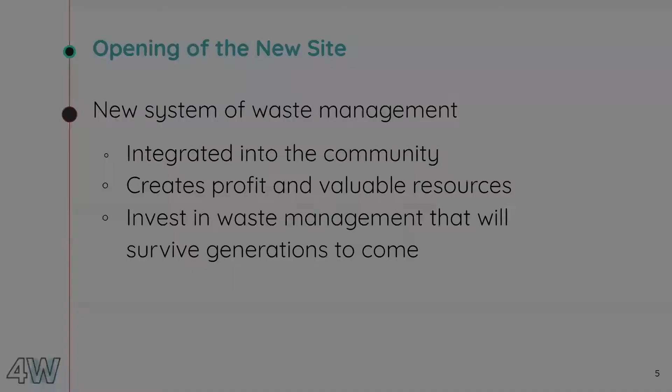In terms of some of the societal impacts that we want to implement, we really want to improve quality of life for everyone in the area. And that includes ending discrimination of waste pickers and other people who work with hazardous waste, creating well-paying jobs, and ending child labor. The current site is across the street from an orphanage, and that's actually been a source of child labor in the past, and we want to end this practice. And with that, I'll turn it over to Maddie.

First, we'll be going over the closure of the old site in Bakote. This section will discuss the implementation of the gas collection system, the cover, a groundwater pollution mitigation system, monitoring processes, as well as the redevelopment of the old site, and an overall financial analysis.

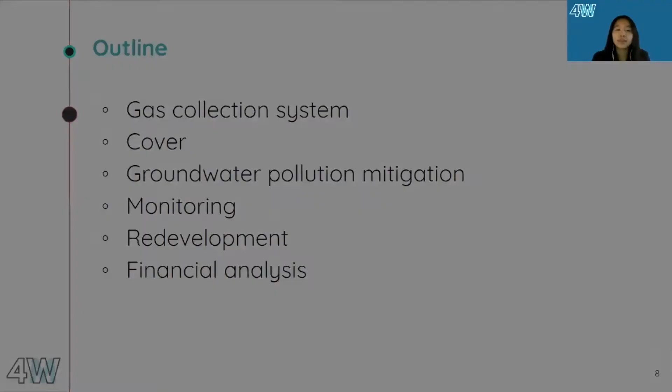So, a gas collection system is required for closure because the decomposition of organic waste in landfills produces significant amounts of methane and carbon dioxide. This is undesirable because it can cause instability of the site and potential collapse. Additionally, methane is highly flammable, so it can cause uncontrolled fires. The emissions of these gases from the site are harmful to our environment, and gas migration to the communities is also harmful. Thus, a gas collection system is necessary for closure.

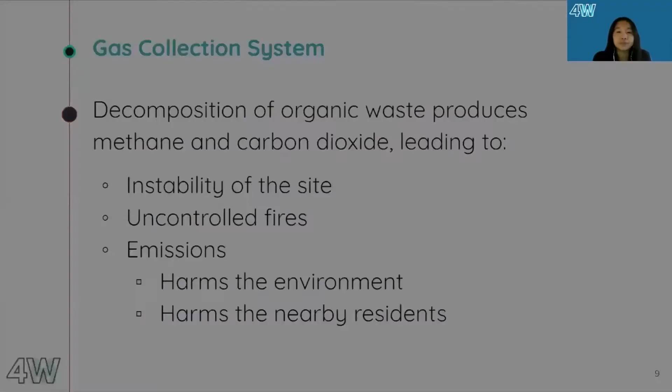Switching from an anaerobic, without oxygen, to a semi-aerobic, with oxygen, decomposition process can reduce emissions by up to 40%. This is done by installing gas extraction wells in the landfill to introduce oxygen into the waste and allow for the gas to escape up through the wells in a controlled manner.

So first, a hole will be drilled into the waste layers with a well drilling rig. Then a perforated pipe will be inserted into the borehole. The area surrounding the pipe will be filled in with gravel, which will prevent anything from entering the pipe, so it's just the gas that will be extracted. Above the perforated section, a layer of backfill will be added, as well as a layer of bentonite in order to prevent air intrusion and gas escaping outside of the pipe. Finally, a landfill cover will be installed, which will be further detailed in the next section.

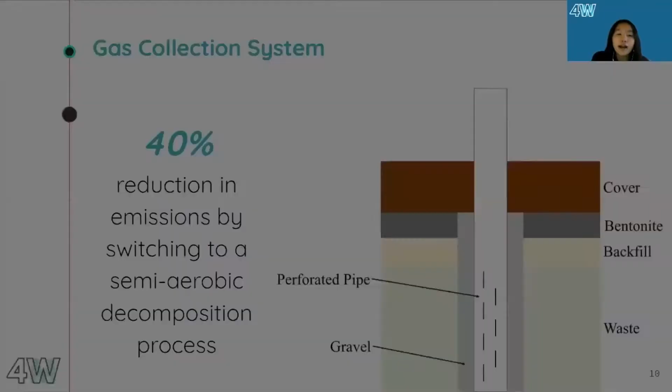A preliminary study to measure the amount of gas should also be conducted in order to determine the effective radius and how many wells need to be installed. Then, after gas is collected by the extraction wells, it will be combusted using a utility flare design. This is the simplest and least expensive combustion technology while still achieving a 98 to 99% combustion efficiency.

Another option that was under consideration was converting the landfill gas into renewable energy. However, that would require an extensive installation of horizontal pipes both beneath and above the waste, as well as building facilities to convert the gas into energy. Thus, the treatment of landfill gas is not physically or economically feasible for the Bakote dump site.

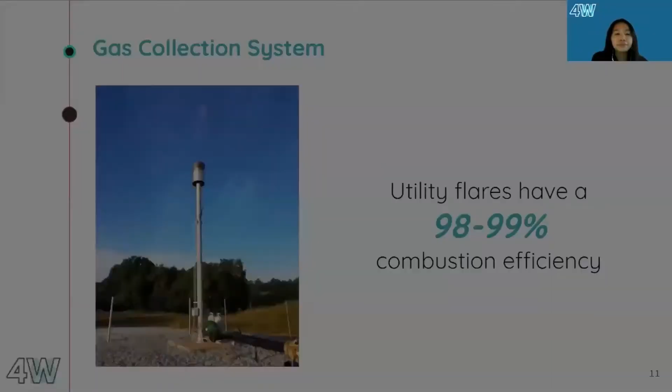Next, I will be going over our proposed landfill cover. We propose an evapotranspiration cover for the Bakote dump site. It consists of 3 layers above the waste layer: an interim cover, a coarse grain layer, and a fine grain layer. First, landfill compactors will be used to compact the waste prior to the installation of the cover.

Then the interim cover will be immediately above the waste and composed of compacted clay. This will prevent any surface water from entering the waste and generating more leachate. Gravel or sand can be used for the coarse grain layer and will help reduce water percolation in the interim cover. And the fine grain layer will use available soil and it will retain any water until it's removed by evaporation or transpiration through the vegetation.

Tractors will be used to compact the waste and load the soil into the layers. A landfill cover is required because it prevents surface water from entering the waste and reduces leachate generation. It also prevents landfill gas from escaping from the landfill and forces the gas to vent through the extraction wells. It also reduces odor and insects.

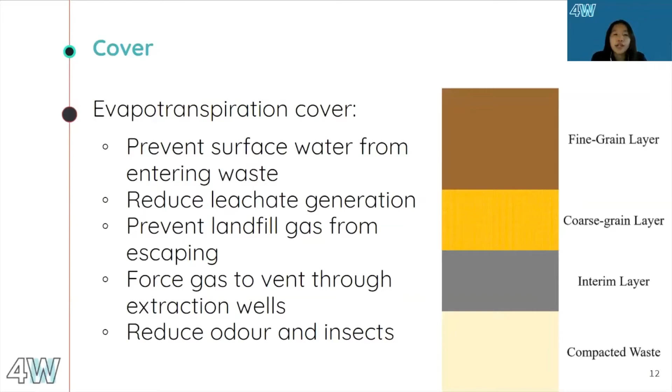Pollution from leachate generated within the landfill can seep into the groundwater and affect human health. A proper landfill would typically have a liner and leachate collection system in order to solve this issue. However, since the Bakote dump site is already full of waste, there would be many challenges in order to install a liner and leachate collection system. It would be very labor-intensive and expensive and is not feasible for the site.

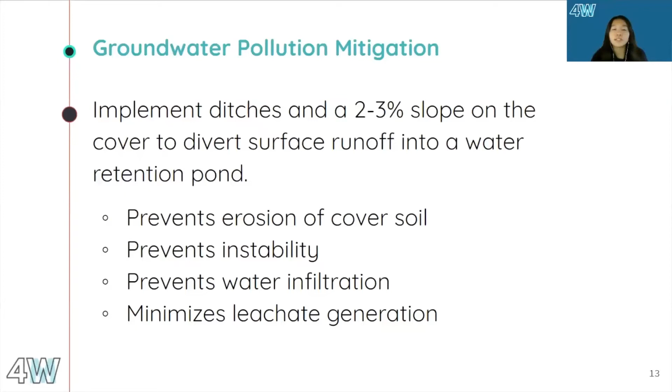A more suitable way for the Bakote dump site to minimize groundwater pollution is to divert surface runoff. So we propose a cover with a slope of 2 to 3%, which will ensure adequate diversion of surface water. Ditches on top of the cover should be constructed to guide the water into a water retention pond. These methods are much simpler and less expensive than an entire leachate collection system, while still producing good results for mitigating groundwater pollution. It will prevent erosion of the cover soil, which could have led to instability, and it will also prevent water from infiltrating the waste and generating more leachate.

The landfill should also have groundwater and gas monitoring wells to observe the effects the landfill may have on the community after closure. The groundwater wells should be located both upstream and downstream of the landfill and should be checked at least every 3 months to account for variability in the seasons. Ambient air monitoring should also be implemented upwind and downwind of the landfill to understand the impact of emissions on the surrounding community. Samples should be collected and averaged at various times during the day to account for differences in wind. These monitoring procedures will evaluate the state of the landfill and determine if any additional measures are needed to ensure the safety of the community.

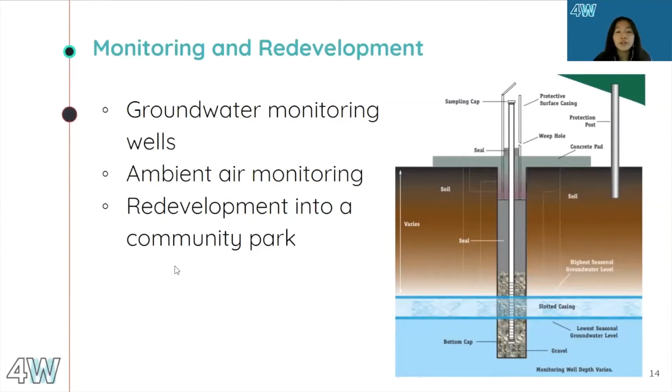The monitoring will also allow the closed landfill to be redeveloped into something such as a community park. As long as these conditions are well within safe for humans, the site can be redeveloped to the wishes of the community. The community could work together on their own vision of what this new recreational land could look like.

The closure of the Bakote dump site will require funding that can be supported by the government, international organizations, and waste management fees. The Kanifing Municipal Council already has a variety of active vehicles in their possession that can be used towards closure, and the total cost of materials and equipment required for closure is projected to be around $3,658,000.

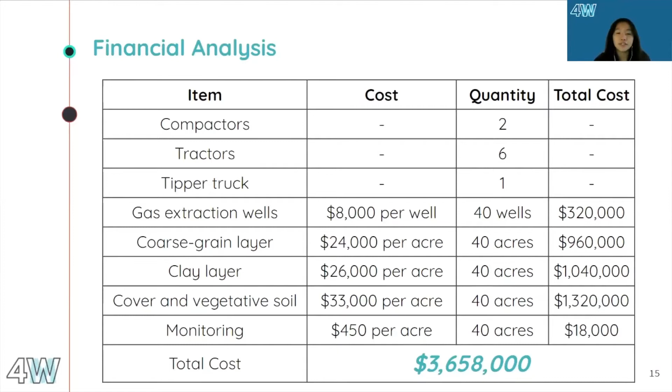Okay, now let's talk about the opening of the new site. To design a new site, we need to predict how much waste we need to treat in the coming years. Using the waste growth data from the early 2000s, we formed a mathematical model to predict the waste output over the coming years. By 2030, we predict approximately 1,700 tons per day.

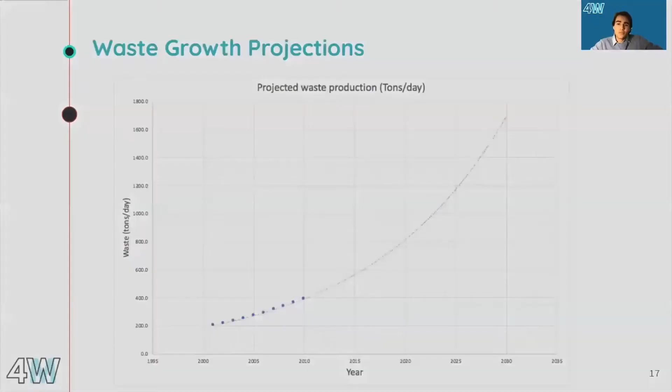With that said, we outlined a few requirements for the new site. First, we needed a design to handle the projected waste in the coming years. Second, we needed to design a way to efficiently transport the waste from the communities to the new site. And also, we needed to evaluate and consider different options to minimize costs and to maximize streams of revenue. And finally, we wanted to increase employment opportunities within the surrounding community. With 14 acres, our space is limited. But our main goal is to eliminate the harmful effects of a traditional landfill and to save the lives of the surrounding community.

The design of our proposed site has 3 main stages. The first stage collects, contains, and sorts the waste, while the second and third stages treat and transform the waste. We will now look at these more deeply.

In the first stage, the waste will be dumped into a temporary landfill. This landfill will be constructed of interlocking cells with liners to prevent toxic runoff. This will also have a leachate collection and processing facility and a gas collection system to collect harmful emissions such as methane and prevent them from going into the surrounding environment.

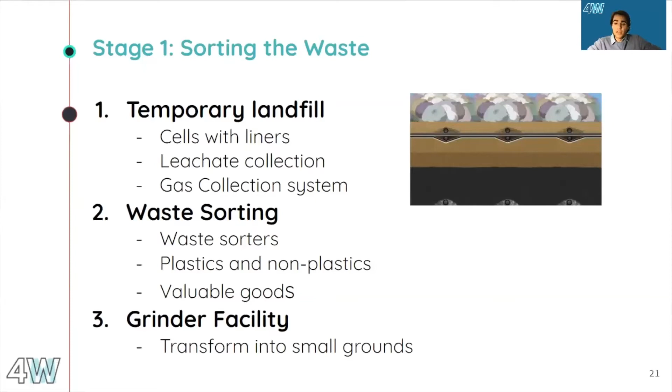After the waste has been sorted for recyclables and valuable goods, the waste will then be transported to a grinder facility to grind the waste into smaller grounds for further processing. So stage 2 would be transforming the waste into a thermoplastic composite material to manufacture products like bricks and construction material according to the needs of the community. This whole process is from a patent by UBQ Materials, who patented this process.

So the first step is loading degraded heterogeneous waste into our heating facility. The heterogeneous waste is required to be at least 10% and a maximum of 60% plastic, and others will be non-plastic. And this is crucial to the second step of heating, because not only will the heating melt a proportion of the plastic components, which will help integrate the whole heterogeneous waste together as it acts as a binding agent, it also reduces the volume of the waste.

And after heating, it will be transferred to a mixer facility where the waste will be further integrated and becomes a composite material that has the material properties of plastic, but also the durability of other strong materials. With the different objectives of the industries around Gambia, the composite material will likely be pelletized for storage and later used to form different products as needed. However, in this project, we're going to assume that bricks are going to be the main outcome of this process.

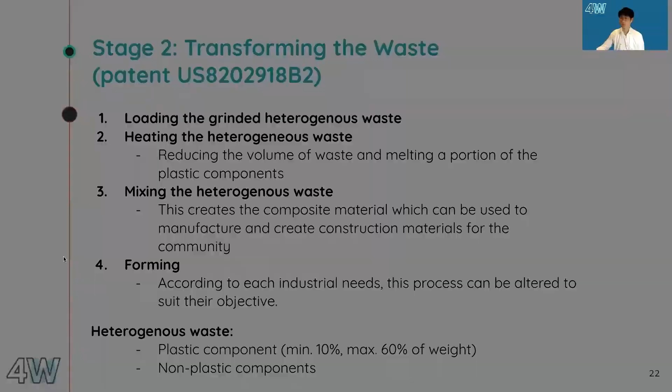So the third section of this process would naturally be the handling of the organic waste. After different considerations, social and also financial, we decided to compost the organic waste. Firstly, the collection of the organic waste would occur at the client level, the residences in the community, in the KMC. The inorganic and organic waste will be required to be separated by the residences into bins, where the collection vehicles would transport each individual bin into our collection site in the ward. After collecting the organic waste, they will be handled in the ward at our collection sites for composting.

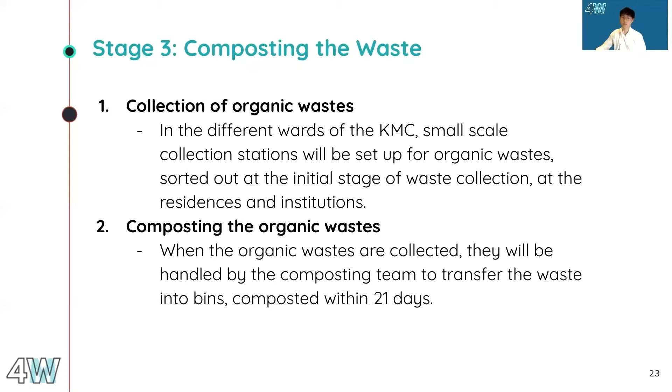Bins of around 5 ton capacity would be filled with organic matter, which requires a 30 to 1 carbon to nitrogen composition, turned and tumbled every day to distribute and maintain the heat within the composter. This will be done by employees that we hire within the community, and this process will take at most 21 days, which is very efficient given the available options. So the benefits of the proposed site would be employment creation, but it also reduces the waste volume as most of the waste would be transformed into useful materials like bricks, construction material, and also fertilizers for the majority of the workforce in Gambia as farmers.

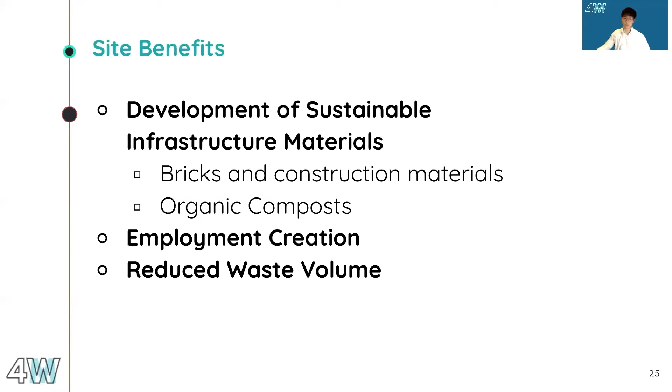Now, the transportation of waste. The transportation system is comprised of small and large trucks. The small trucks will collect the waste from collection sites within the communities. Then, these trucks will drive to a centralized location of larger dump trucks that will transport the waste to the dump site. These decisions were made as the small trucks are capable of reaching harder to reach locations within the communities than a large dump truck. Additionally, the large trucks are able to drive over uneven surfaces and over longer distances to the dump site. And according to UN Habitat, this system is actually very affordable.

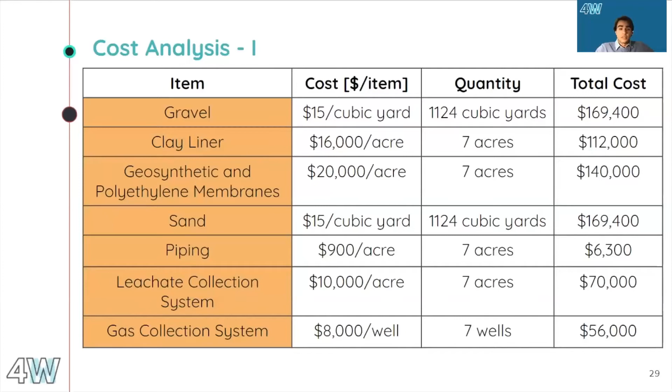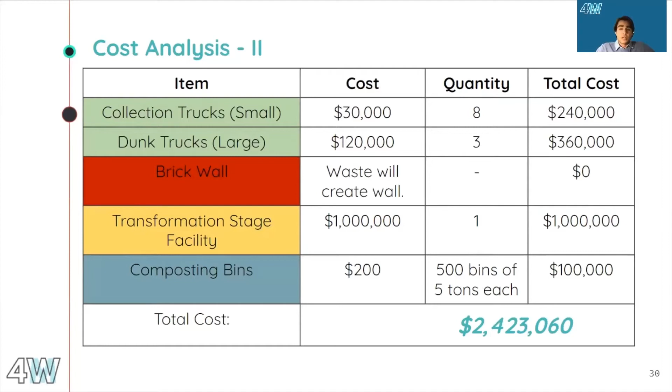All right, so in terms of cost of the site, we created a table and outlined the different costs. In orange, this goes over the first stage: the temporary landfill, the leachate collection and gas collection systems, while this half of the table goes over the transportation network costs, the brick wall costs, and the transformation and composting facility costs. And our solution comes out to approximately $2.4 million.

Our main objective of this whole project would be to generate revenue that can sustain this whole facility. With our optimistic estimates, as detailed in the report, we reveal a yearly revenue of nearly $6 million US. This will not only recover the costs invested, but it will also generate economy and cash inflow into society.

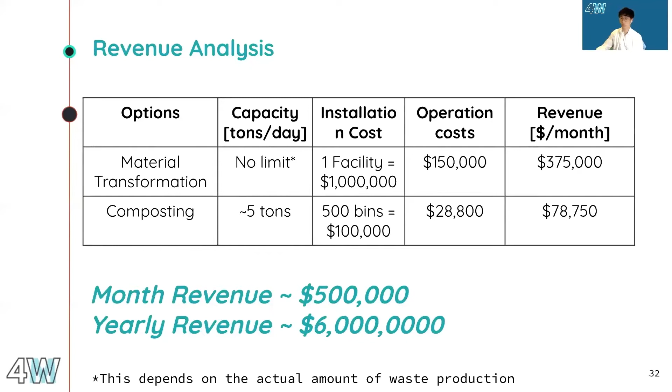In terms of employment opportunities, we need drivers to drive both the small and large trucks. We need sorters to go through the waste and to extract recyclables and valuable goods, while we also need compost workers to work on the third stage of transformation. Additionally, we need security crew to overlook the facility, and we also need facility workers, HR, and management to manage projects and to maintain structure within the facility.

Our site will create over 130 jobs. It will bring over $900,000 in wages per year, and will also create opportunities to grow. Before we designed the site, there were three main considerations that we considered. First, we considered a basic landfill in the new site. While this solution seems reasonable, the predicted waste growth will not fit within the limited space. Next, we considered an incineration facility. While this is beneficial to minimize the volume of waste, it emits toxic emissions and has an ash-like byproduct.

Next, we considered a plasma gasification facility. This not only minimizes the waste volume, it also has two valuable byproducts of slag and syngas. While this was a great idea at first, upon further research, we found that it was way too expensive, and the costs to repair and manufacture the facility were also very expensive.

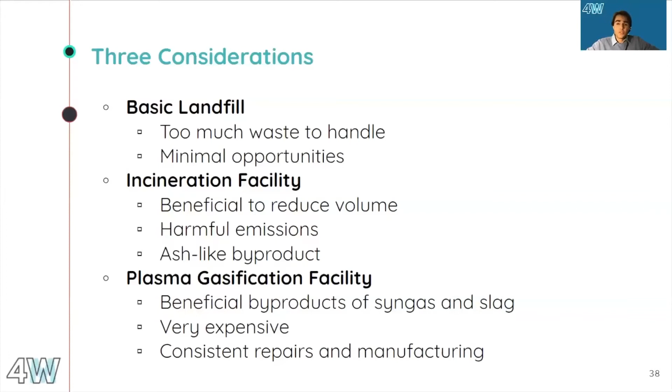And now for some concluding thoughts on our proposed solution. For the closure of the old site, we will have achieved successful closure using a quick solution that minimizes harm, and there will be continued monitoring and redevelopment of the area. For the opening of the new site, an entire new system of waste collection will have been created, as well as a lot of new jobs, and we'll be employing innovative technologies that will last for decades.